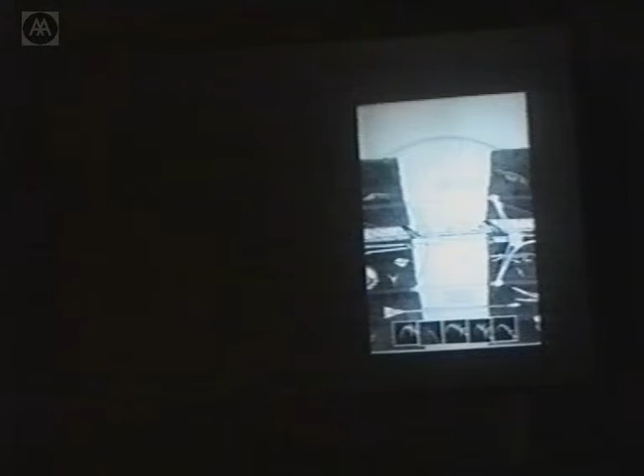And hopefully we can tell you a bit about how we have worked over the years and how our ideas have developed. Well, it was an irresistible competition because the title, The Bridge of the Future, was quite irresistible. And then the idea of actually designing a bridge related to nature was part of the brief. So that got us to thinking about how nature would design a bridge.

And we got talking about the structure of a horse, and then that led us on to the structure of a dinosaur, and that became the inspiration for the bridge. On the right-hand side, you can see nature tends to design very efficiently and very beautifully. That's a vulture's wing in the form of a Warren truss, and this is the skeleton of a dinosaur, which became the inspiration for the bridge.

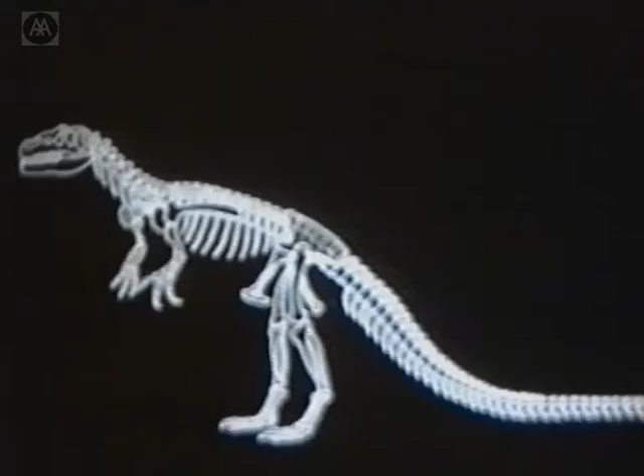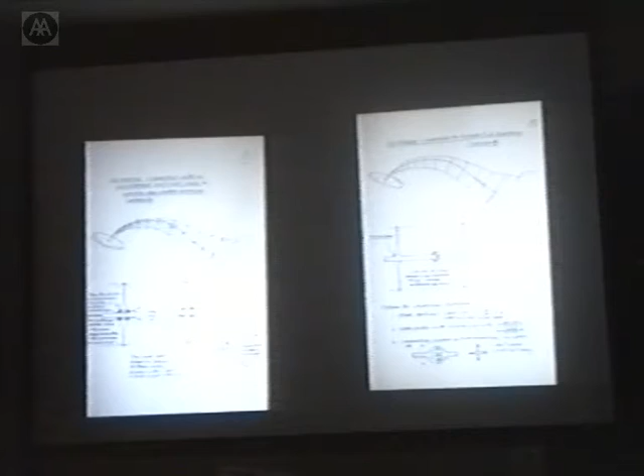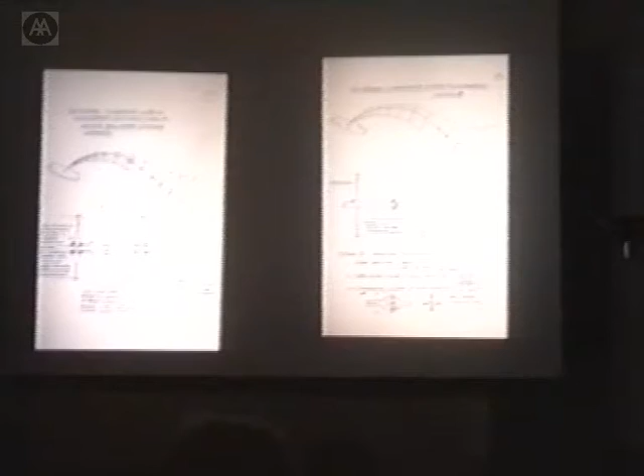We talked quite a lot about what we wanted the nature of the bridge to be like, how you'd experience it as you walked across it, and the idea of the suspension bridges that you see in the desert or something. You just walk along and they kind of move as you go along it. And since this was a pedestrian bridge, there's no reason why it should be really, really rigid. Engineers are generally taught to design movement out of a bridge, and we decided that the experience of actually walking along a safe but movable bridge would actually be something that we were after.

So we started kind of faxing what we thought we were talking about back and forth. And strange hours in the morning and the night. Yes, exactly. The 8-hour time difference was quite helpful.

We kind of got onto this idea that it would be a bridge anchored on one side, so have vertical and horizontal support on one side, the right-hand side on this slide, and at the other end it would be supported by almost a ball bearing that could roll around, and started to explore what the nature of the structure needed to be. And we had in mind the quadrupedal bridge that D'Arcy Thompson talked about in On Growth and Form, of the vertebrae carrying the compression and the tendons modifying the deflections, but not actually stopping movement.

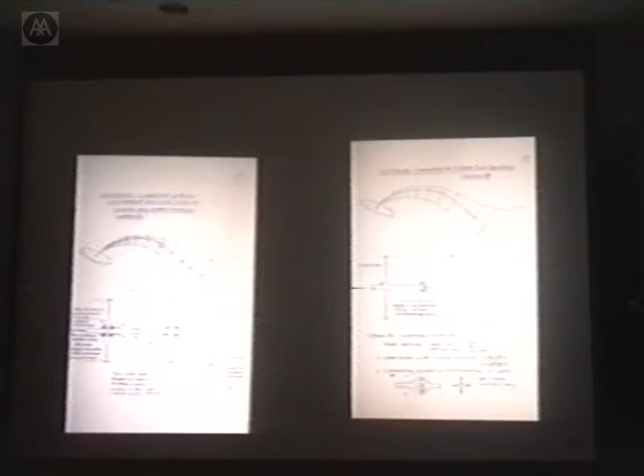And those slides just show what the connections between the vertebrae need to be, whether it needs to be moment connections between them, which is the slide on the right. If you didn't have any cross bracing at all, then you'd need to try and get moment connections at those points.

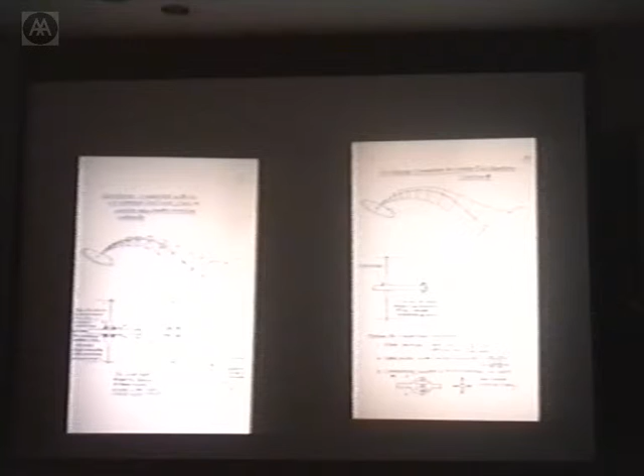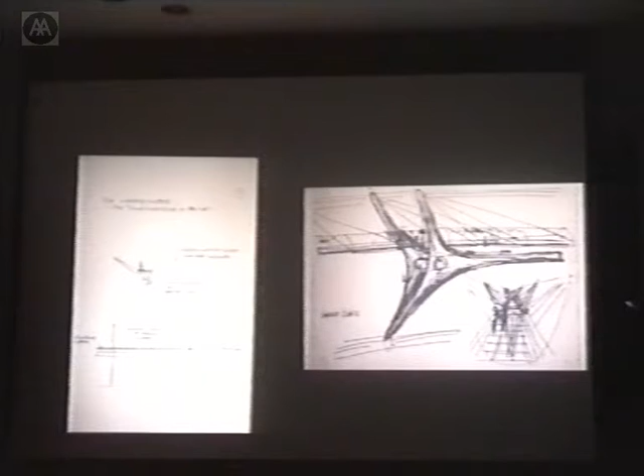And then the slide on the right shows the fax from David and Julia saying, well, could all the bracing come from one side, and what's the walkway like? How should it be supported? And so we developed that idea with all the ties coming from one side and going for the moment connection between the vertebrae.

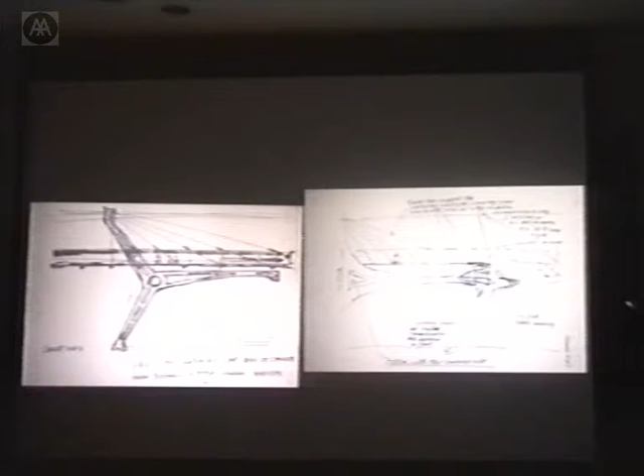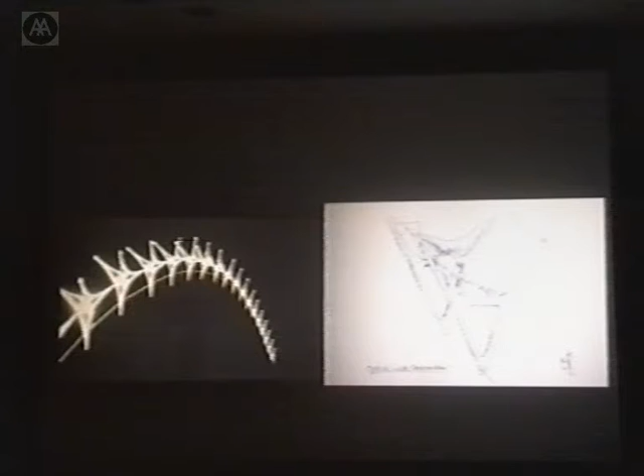And these slides show the development of the idea of the vertebrae. So the one on the right was my doodle, and then David and Julia made the model on the left. We made the model at the same time, sort of on the other side of the Atlantic. It's an upside-down model.

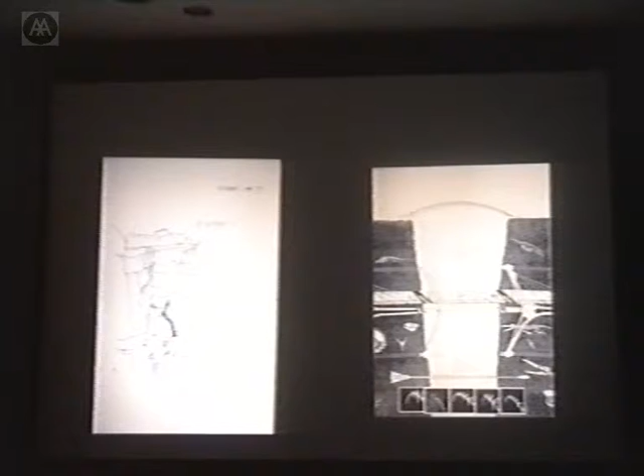Yeah, and well, for the entry, we had to actually decide where this bridge was. Up till then, we'd been really just talking about an idea of a bridge in the abstract. So we decided to put it over the Grand Canyon, since that was in between us at the time. We won the competition, by the way.

And then, after that success, when I came back from LA, there was another competition for bridges to replace the covered timber bridges in Vermont, and the idea was to have a whole series of bridges, different spans, but all the same idea. And we wanted to look at using timber, but in a more modern way. And also the idea of using the deck in composite with the structure below, so that you actually get a very thin deck.

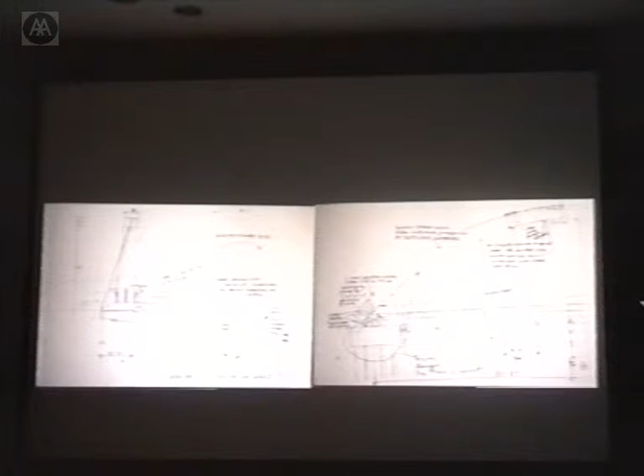So in fact, the deck is reinforced concrete, a thin 6 inches of reinforced concrete on top of timber beams that are all laid on edge, and you get composite construction by having shear connectors between them, and then just having the tie underneath to increase the lever arm, that part there. So the deck just needed to be deep enough to span between the edge and the midpoint of the deck.

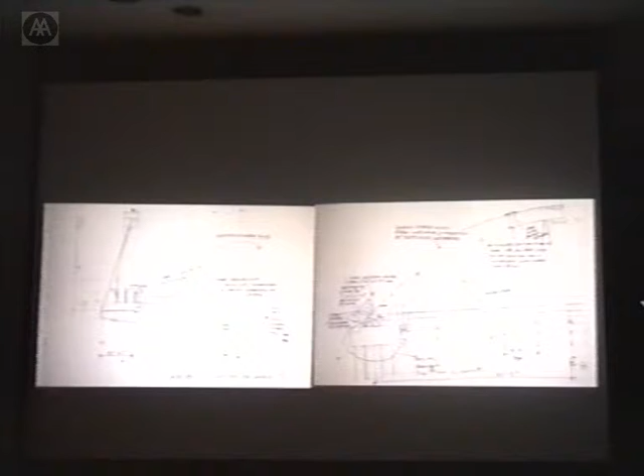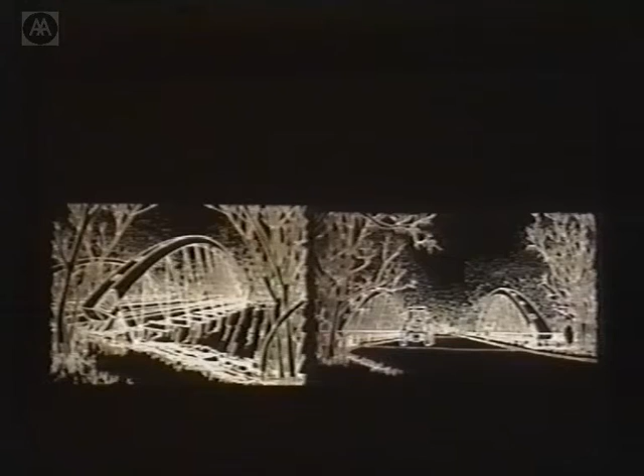It actually was a competition where we had to submit the calculations with the entry, which is a bit unusual. We then did another competition, which in fact was successful in terms that we won the competition. It didn't actually get built.

Speyhawk had its competition for a local centre for Thames Valley Park near Reading. This was a 200-acre business park that they were developing at the time, and 100 acres of it was going to be a natural park, and the other 100 acres was going to be a large amount of office space.

But this was the local centre that consisted of a 150-bed hotel, something called the Information Age Centre, which was an exhibition centre sponsored by people like the Science Museum and various members of the IT industries to display their wares. It was actually going to be an extension of the Science Museum, and it was designed for children from 7 to 19, trying to get more people into the IT industries, and that was linked to a conference centre and a leisure retail building.

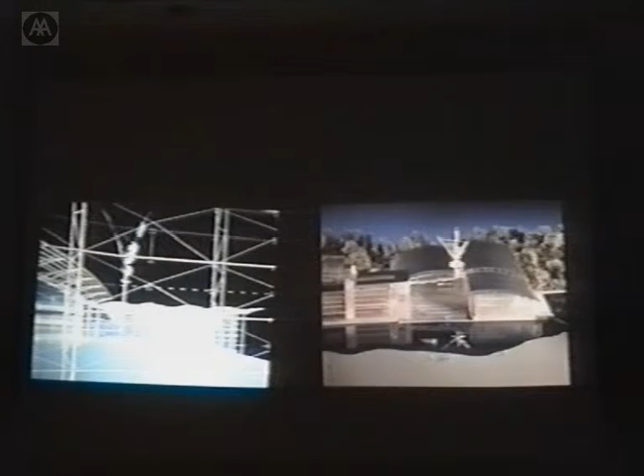the slide on the left shows the beginning of the ideas for the structure. These buildings here have 34-metre clear span, and the columns in this direction at 14-metre centres. And we wanted to have a structure that would look quite light and be expressive. It's basically primary curved trusses along these lines that then support these gull wings, which have a strut on top here, so that they're bending stiff, and there's a pin here between them.

Because of this kind of arch shape between the trusses, that actually gave lateral stability to the primary trusses, which was quite handy. And then just a couple of places down each side, we put cross bracing between the columns. This was our flight of birds.

Then we were invited to Liverpool by the Merseyside Development Corporation for a limited competition to look at the Pier Head site, which, as everyone probably knows, is the primary public area in Liverpool. And if you go to the next slide.

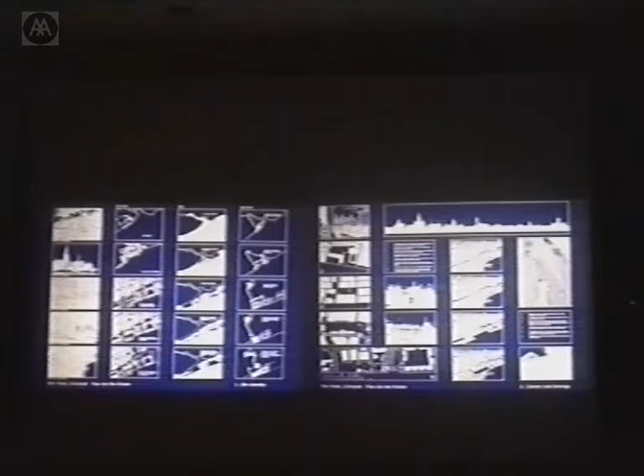And this was another part of the site analysis, which showed comparative sizes of various public spaces. This was Venice, that was Beaubourg, and that was Red Square, which was quite incredible. We actually discovered that Pierhead was about the same size as Red Square, which was a bit of a surprise to us.

The brief basically had two strands, one of which was to design a landscape plan, a £3 million landscape plan for Pierhead that could be carried out in the short term. And they also asked for a vision for the future.

And this sort of incorporates the two of them. And one of the things that we proposed was that this 6-lane highway be put underground, for the sort of long-term plan, so that area could become a park. It's gone again. Anyway, the area between the Three Graces buildings and the central town could become a park, and actually, that would make this link between the Mersey and the centre of town.

The other thing we did was we talked to Tom Lawson of Bristol University about the space, because it's a very hostile space. I mean, it's very dramatic and it's a wonderful space, but it's also quite hostile, very, very windy. People have been known to have to hang on to lampposts in order to stand up in certain wind conditions. So we talked to Tom Lawson, who's an expert on wind, and talked about where we might position various buildings to

temper the environment. And the conclusion was that this winter garden, which we proposed along the parallel to the Mersey, would actually create a sheltered walkway along the Mersey, which is something that the MDC is promoting all the way to Albert Dock, which is sort of that way, to Princes Dock, which is that way. And also, it would help the environment in the main space as well. So maybe you'd like to talk about the winter garden.

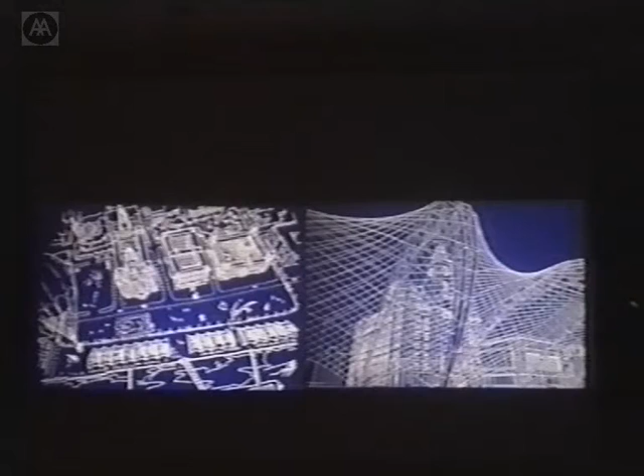And also, it's a structure which basically has triangulation in plan. If you go from the ground and find a cable that goes up, it then hits an arch. So you do get triangulation for loads in this direction, which you can rely on if you're using cables, but you wouldn't be able to if you were using fabric, because with a fabric structure you always have to think of the situation of what happens when there isn't any fabric there. And then across in this direction, the arch itself is quite stable.

We also developed a system of natural ventilation for the winter gardens with our services engineer Loren Butt, and we talked to glass manufacturers, didn't we? We talked to Pilkingtons, who are actually being reasonably helpful on this project.

Yes, they didn't throw up their hands. Perhaps they didn't think we would win.

Well, this is another competition, Venice Gateway competition. Yes, we'll describe this very quickly. This was, everyone probably knows, the Piazzale Roma, and the proposal was for a gateway along the canal, and also it was redesigning the coach station. Maybe you go to the next one, we can describe the structure. Yeah, we'll just touch on this quickly.

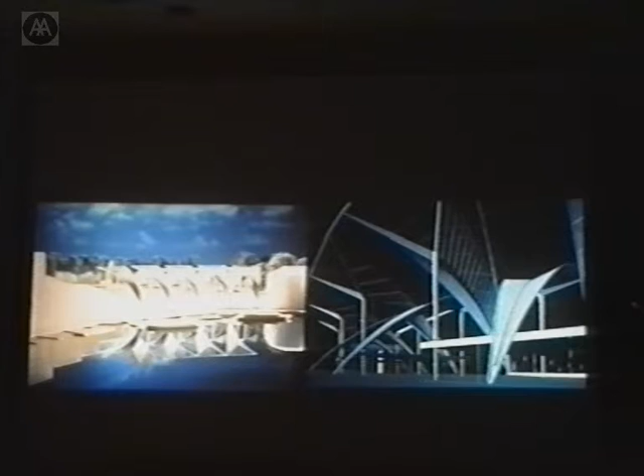So it was looking at these panels which are folded plates, which really just act as a 3-pinned arch. So this plate has some bending stiffness because it's folded and goes up to the top of that column, and the column goes down to the ground. And each of these plates actually touches each other so that they lean against each other in that direction. And we were using timber, and the references were to the hulls of the gondolas, the boats. And sort of Gothic arches. Yeah.

Now, all of those competitions and things, I suppose, were really the foundation of our conversations. We're just dipping in and out of conversations a lot. But then finally we got to a project which we got to build. Yes, first built project. We were invited back to Liverpool by Merseyside Development Corporation to design a water sports centre, which was going to be in Queen's Dock, which is there. So it's all the way along from Pierhead there.

And there was actually an existing water sports centre that was housed in Portakabins and things like that. A very successful one, which was mainly for kids in Liverpool to learn how to sail and windsurf and canoe. And what they did was they gave hour-long courses, which were cheap and therefore accessible to a very wide range of people.

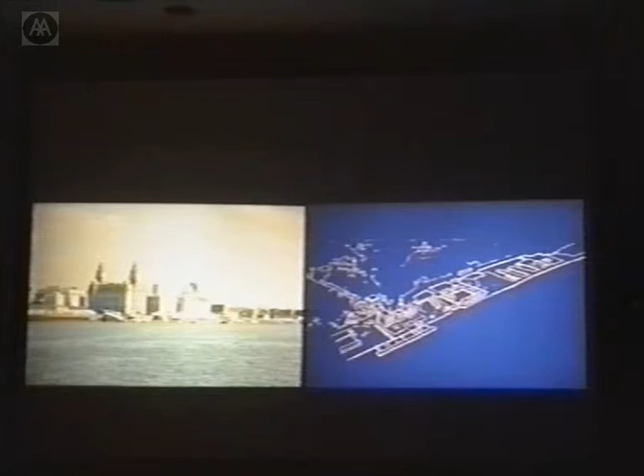And we continued the historical research, and we looked at the traditional buildings that had been built around the docks, and this was one that we discovered, which was cast iron columns with timber infill. And that on the right is actually a picture of Queen's Dock, only in 1948; the dock actually declined very, very quickly.

So we knew we had this site which was basically a bit of water that you had to get to by bridge. The client gave us a site which was in the water, and he gave us a budget, and that was all he gave. And the budget was about £1 million, so quite small. And so we started off looking at ways of putting a building on the water. That's what the slide on the left is.

The water level doesn't vary by very much, about 300 millimetres, plus and minus. And in some ways it would have been very nice to have a floating structure. We actually did some research on making a sort of barge structure, or even trying to buy an old barge. That turned out to be the most expensive option. It would have blown half our budget, so it was just out of the question.

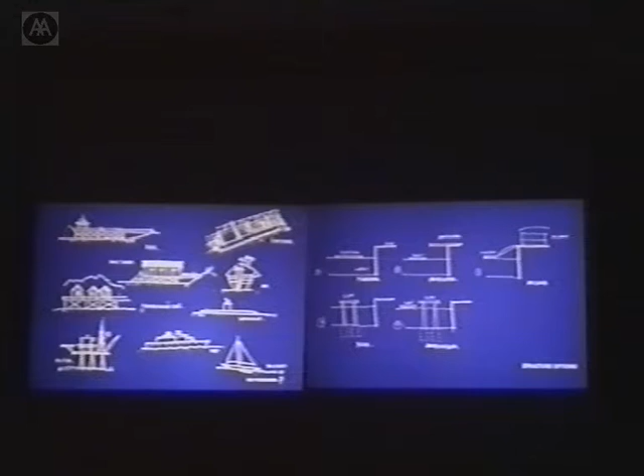Which is why we ended up with the option that you can see, number 5 on the right, this combination, basically piles that go down to the bedrock. So they're about 13 metres long, and they support a deck that's just above the water level, and then we'd have floating pontoons around the edge. They would go up and down, with a ramp so you could get up to the level. And you get to this building by bridges off the dock wall, which is what the slide on the left shows.

So basically the brief was for showers. There was a very clear component of wet facilities, which was showers, staff facilities, storage of wetsuits and things like that. And then there was the clear division with the dry component, which were the offices. They wanted a lecture theatre and a cafe.

So we developed this fairly simple diagram which had the wet at water level and the dry at dock level, because another of the features of the Liverpool docks is that there's this approximately 3 metre difference between the dock level and the water level. And we used that to advantage in having the main entrance to the upper level. And then you went down to the boat storage and the workshop and the plant room.

And so the slide on the right shows the structural diagrams. Starting from the deck, it was important that the columns would be set in from the edge of the deck so you can pull in the boats and windsurf boards, etc. But at the level above, we really wanted to have a clear space from side to side. So that's why these columns come up and then branch out, picking up the edge columns and also reducing the span of that slab.

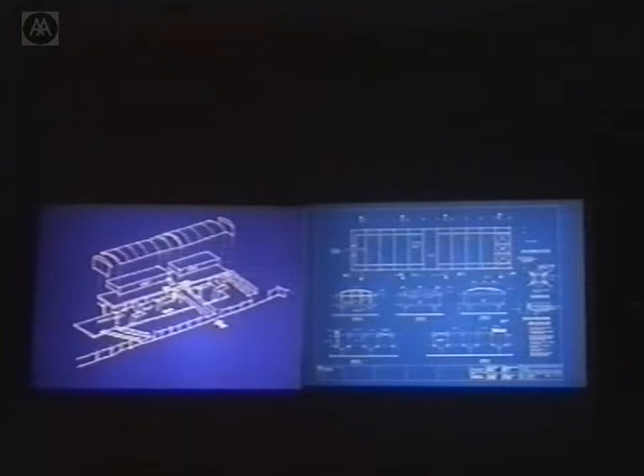Each of the tops of the columns then support a frame which is basically a rectangular frame with a curved beam on top, which is pinned at both ends. And the bottom of that rectangular frame supports another concrete floor. So the slide on the right shows the build-up from piles, deck, columns spreading out to pick up this series of frames. And so the building is like cantilevered 13 metres up in the air from the ground, effectively. Except that's covered in water.

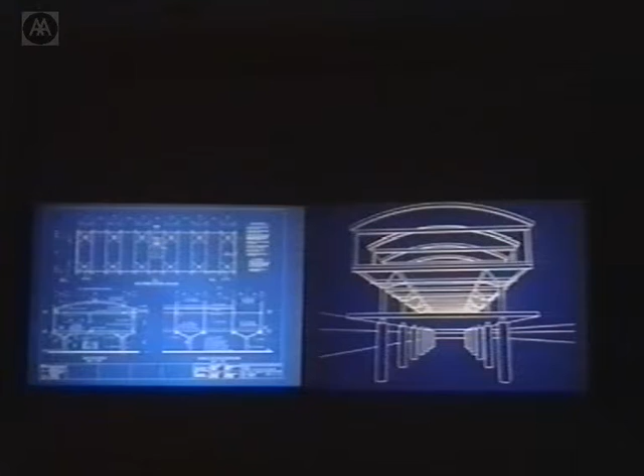It's quite a light and simple structure, but the structural bit that we put money into was this connection between these columns, which cantilever, and the branches that they support, and we decided to see whether we could afford to have castings for that. But it's true to say that the technology for castings has actually developed such that it's not actually that expensive to do.

One of the reasons for keeping it that far out in the dock was that part of the brief was they wanted a sheltered area. So this becomes, yes, for the beginners to do their sailing, and also for competitions for canoeing, so that distance to the deck was determined by that, and also security.

I mean, in Liverpool, security is a slight issue. Big issue. Yeah.

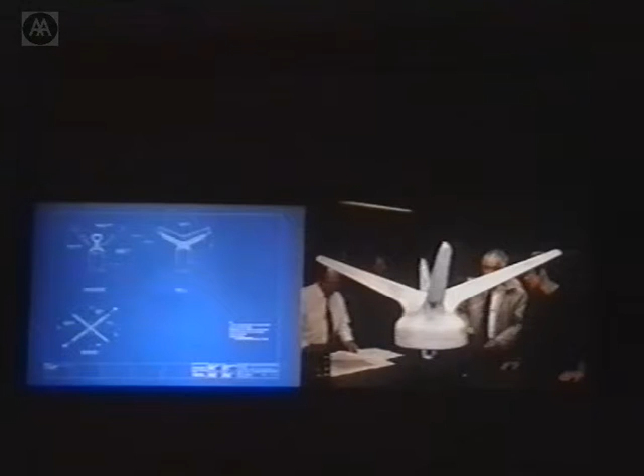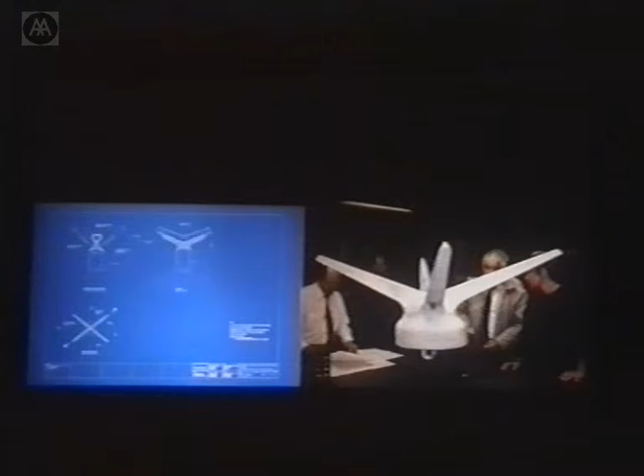And one of the things is that because you had to bring it on site and put it together as easily as possible, we specified that they would have to do a trial erection in their works. That's the slide on the right, to make sure that they did get the plates in at the right angle for that pin joint.

And you can see on the slide on the left the shear studs here for the concrete that was going to be cast on top. It was in situ concrete for that deck. And the other thing to say about the steel is that for fire protection we used intumescent paint.

Whereas if you just have a primer and put the layers of paint on top of that, then when the top paint gets chipped, you have to strip off a huge amount to make repairs to it. So this has a longer life. Even so, we would say that it has to be repainted every 8 to 10 years.

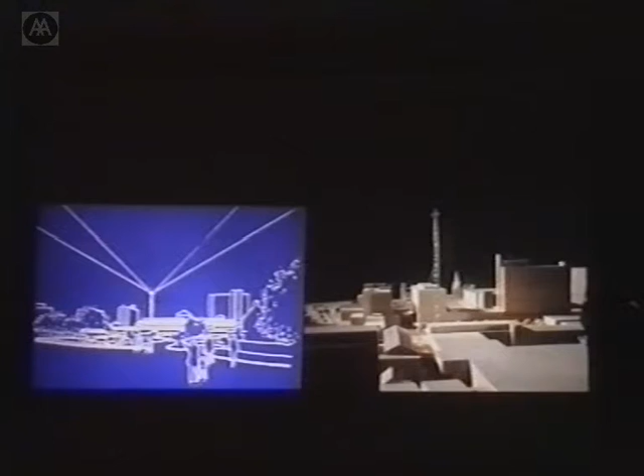Talking to Jane, we examined a lot of different materials that would do that, and we came up with ideas for windmills and looked at wind sculptures produced by Japanese sculptors and all kinds of different ideas. And eventually we discovered dichroic glass, which is a coating that's put on glass to make it work like a beam splitter. The effect it has is to reflect the opposite color of light that it transmits. And it's a very, very pure process because unlike stained glass or tinted glass, it doesn't absorb anything. So the colors are very vibrant.

And in the end, we decided to use solely that material and to put it within a stainless steel shaft, which would reach up into the sky and allow these 5-foot square sheets of glass to spin in the wind. So we looked at options for what this mast would be like. And of course, we did start with the normal options, like 3 verticals and just having triangles connecting them on plan and bracing and everything. But to have the squares being able to rotate and be able to look at that kind of clear of clutter, it worked out much better visually to have circular hoops connecting the verticals.

So this is slightly less efficient structurally, because it means that you'd be putting axial forces into basically a bit of arch at 1/3 of the circle, and you put some bending in. But we found that those forces were not so big that the tubes got really big.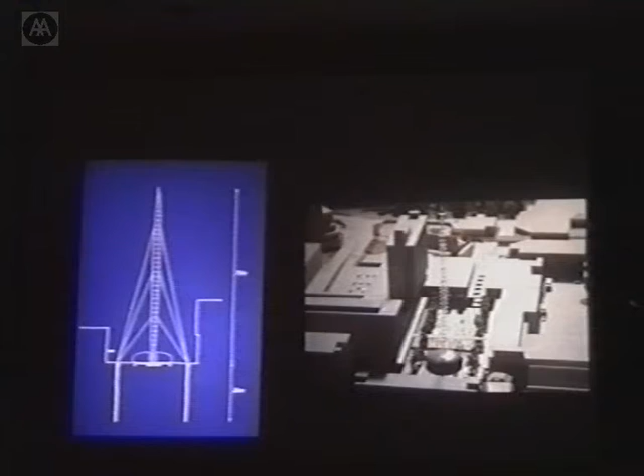But the other thing we had to investigate, and we'll probably need to do more studies on, is actually where the guys should go. Ideally, you wouldn't have the guys quite as vertical as this, but of course we're constrained by the buildings around. And what the guys are really doing is they're controlling the deflection of this cantilever up into the sky. And at one level you could say, well, why can't you just let it move around a lot? And you will see that there are some very skinny masts around. And that's what we need to do at the next stage, is to really determine what the deflection criteria should be. And then we can play around with what the sizes of those guy cables need to be.

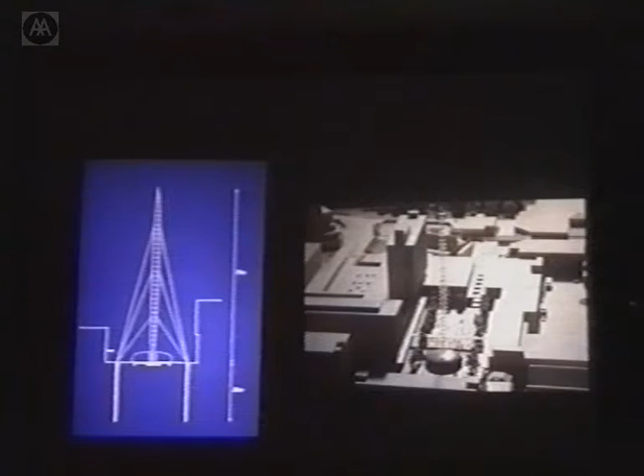The photograph on the right is a photograph of the model, and the model makers very cunningly used actual pieces of dichroic glass, and they all spun. So you could blow on it, and they would spin, and they would do exactly what we thought it would do. So it worked very well from that point of view.

And at the bottom, we're designing an interactive visitor center for kids, so they can come and learn about the weather. And the structure of that's very simple. That's just curved beams all leaning against each other in the middle with some cladding. What's very nice about the structure from the way we see it is that the structure is where you want it. It's on the outside, but it's a very, very open structure. It's very slender. Although it's obviously this great big male thrusting thing into the sky, it's got a lot of feminine qualities about it as well.

Tom Lawson was very interesting about how the glass would react in the wind, and we're constantly learning things about how nature works and affects structures, and the way you need to design them in response to that. And I think that's relevant.

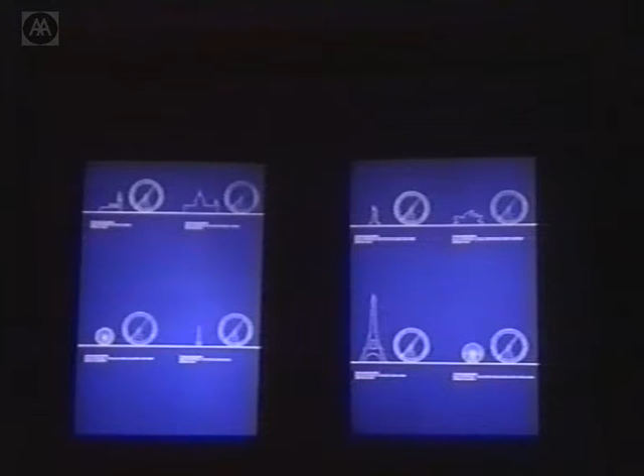This just compares it with some other well-known landmarks. It's big. It's big, yeah. It's half the size of the Eiffel Tower. Yeah. Also, it's hanging over the river.

Well, we wondered whether there was a case for redesigning the wheel, that's probably not the right way to look at it, but looking at the way wheels were designed in the past, it became quite interesting how you would go about building a wheel this big. Not only how it would work structurally, and so you get into how the rim works and how the hub works and how everything works that needs to connect those two bits, but also how you would go about building it, and obviously looking at how other wheels were built in the past.

Up until about 100 years ago, the biggest wheel was the wheel on the Isle of Man, which is 72 feet in diameter, and its spokes are alternatingly compression and tension, because it's all made out of timber, and so it has to be held together. And then there's obviously the original Ferris wheel, and the biggest wheel at the moment is a wheel that was built about 15 years ago at Cosmo World, but it's not a particularly elegant structure, and its supports are even less elegant.

I should really say that when we first started looking at this, it was in response to the Sunday Times competition for a landmark for the Millennium, which quite a few people went in for, and there were no prize winners, and there were no commendations or anything. And I was quite impressed, because David and Julia said afterwards, well, hold on a tick, we don't need this to be the winner of a competition. This can be built. It can make money for itself, and I think they were really quite innovative in just putting in a planning application for it on a site they didn't own, and I think there are lessons to be learnt here about how you can make projects for yourself.

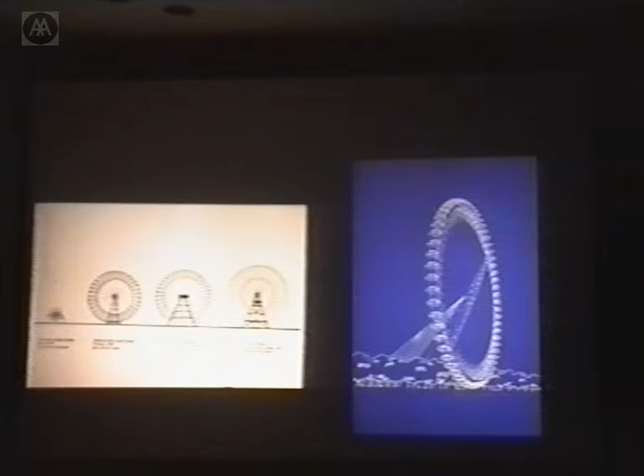And in fact, we found that this arm was quite useful when we were thinking about how you would build it, that in a way it's a derrick. So you could build the support and then construct this arm, which would be sort of in the vertical position, and then from the river start adding bits on and rotating the arm till you get all the way around, if you can imagine that. And that idea of the stiff arm has still remained, but in slightly different form, as you'll see. But here's some more images of that original idea.

Each of the capsules, which is totally enclosed with glass, takes 16 people at a time. So there's actually about 960 people on the wheel at any one time. And it's a 20-minute flight over London, basically. It takes 20 minutes to actually go around it. And much cheaper than buying a ticket to Paris and hoping for a clear day. So it would be accessible to a lot more people. A lot of people who can never even afford to go on a plane.

The only place in London that you can actually see London from a height, and as a whole, is actually at the top of St Paul's at the moment. Yeah. And not everyone can actually climb all those steps. So we worked out today that you could see the Bracknell Tower from the top of the wheel. The other thing is we deliberately put the capsules on the outside of the rim, and they're held in these rings, and so the capsules then go round and round. And we've been looking at the bearings and things like that.

Yeah, the whole capsule. So you'd always stay standing vertically, we hope. And the other thing to say about it is that it's powered by the Thames tidal power. Yeah. Because it moves very slowly, once it's going, it needs very little power to keep going. So we probably would need to use electricity from the grid to get it started. Yeah. But once it's there, then it should just...

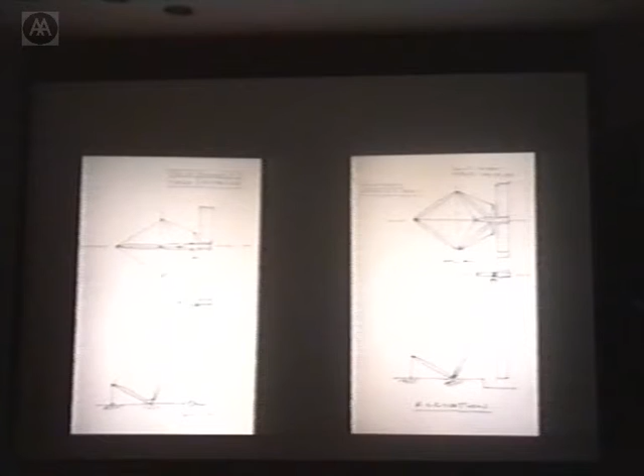And this cruciform member here is the element that's the spindle that goes into the hub. It's like this so that we can have a cable here and here, which provides some rotational restraint at the top of the arm, because when wind blows on the wheel, you've got quite a large tendency for the wheel to twist that we need to resist and carry back to ground. And it's much easier to take it back in this arrangement than to try and take it all in torsion on this inclined element.

So this is what the current design now looks like. This is the right one, yeah. That's the old one on the left, with the inclined A-shaped column with all the radiating ties behind it. And this is the one we've got. There were about 30 or 35 points of connection to the ground with the first design, and with the new design there's only 3.

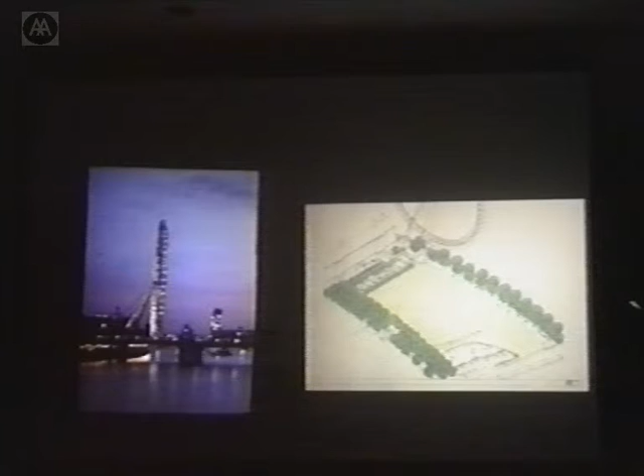So at the beginning of this feasibility study, we kind of opened up the whole discussion again about what the wheel should be like. And you have to go back to the bicycle wheel, which if, say, you have 60 guys, which is quite normal on a bicycle wheel, in fact, then this gives you the thinnest rim, because you've got even support to the rim all the way around its perimeter.

But the problem is you can't really build this. I mean, you can't lay it out over the Thames and then hoik it into position. Not 500 feet. And similarly, this one on the right just shows what happens if you only have 12 guys or spokes. What happens is that you're only supporting the rim at much wider centres, so the rim has to span between these points of support.

Now, just to remind you that on a bicycle wheel, when you look at it in section, the cables don't go straight from the hub to the rim, they sort of cross over, which gives you bending stiffness out of plane as well. So not only does this have to span in the plane of the wheel under loads like that, but also out of plane, there's more spanning for it. So altogether, the rim is working much harder.

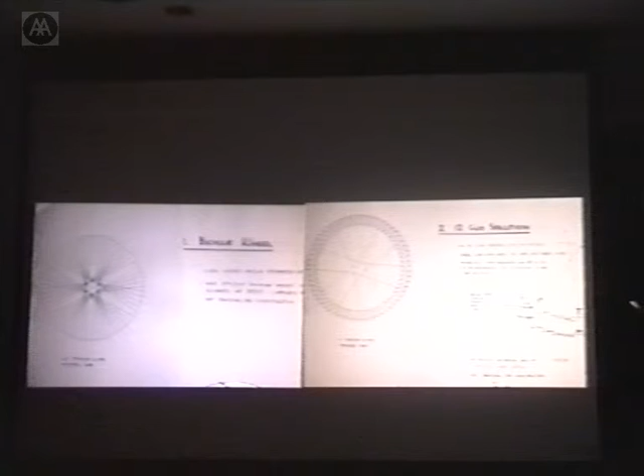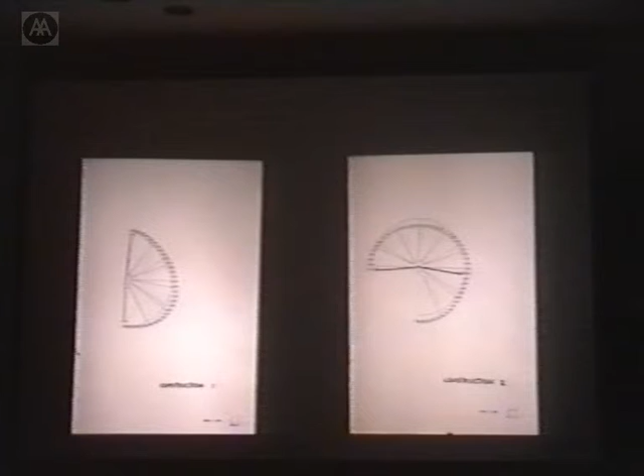I mentioned about construction sequence. In fact, that's turned out to be the most crucial load case for the design of the rim, because you gradually build up. So you've got your arm, and you gradually add the pieces, and you can see how the rim tends to sag under its own weight as you build it up. And the absolute worst case is right at the end here when you want to make your last connection. The scale is exaggerated.

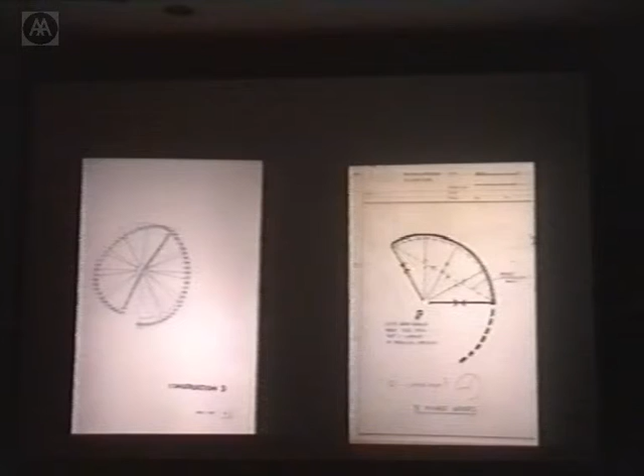In fact, if you had 3 stiff arms, this is showing 2 of them in position, and then another one could be added here. This gives us a much better construction diagram, because you can put a tie in here, which keeps these 2 from having to act as bending elements. They can be just pure compression elements. Whereas here you can see this arm is having to bend to carry the loads. So we realised that there were advantages to adding more arms.

Well, we then got into this whole discussion about what we are talking about when we're trying to get efficiency. And David threw out this challenge, basically: well, what do you mean by efficiency? And Brendan McNiven, a young Australian engineer in our office, thought about this a lot. He said, I'm not going to be defeated by that sort of question. And so he went back to this physics formula, that efficiency is output divided by input, and tried to list out what the outputs and inputs are.

So the inputs are the materials, and you measure how efficient you are in terms of the weight of the materials and the cost. He's Australian, that's why he talks about dollars. And the cost to the environment. And then in design terms, he meant our design effort. There's time and cost. And the energy to making the material and also to running it is measuring cost and cost to the environment. And what do you have to gain?

Well, there's the aesthetics, the wheel itself, and then as part of its environment, and function, it has to work. You just make sure that it doesn't cost too much, you can carry the right number of people, and everyone's happy with it. And then after the 5 years when we take it down, can we reuse it again or can we sell it?

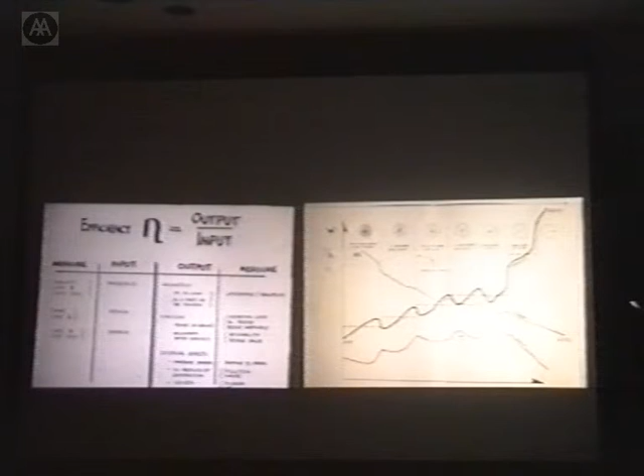Can you explain what you mean by a spoke? Oh, right, yes. If you imagine, you know what a bicycle wheel looks like. That's what I'm talking about. I think we call it a spoke rather than just a tie, because it's pre-stressed, so it can take compression as well as tension. But we've been debating what word we should use, whether it is a spoke or a guy or a tie. Anyway, that's what we're talking about.

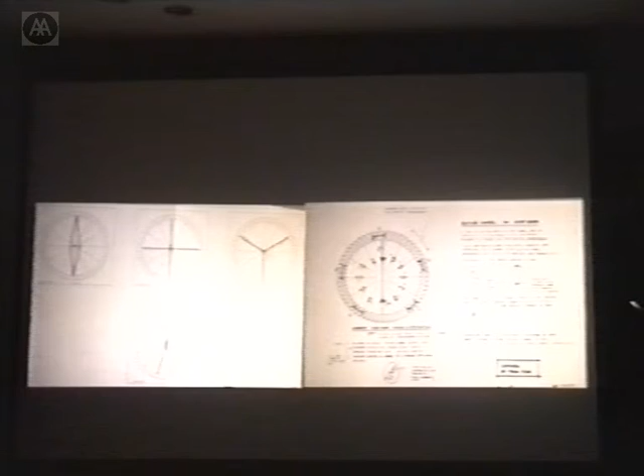And we had to keep trying to draw up what it would look like. The slide on the right is again exploring this thing about the stiff arm, and whether we could just replace, so this is a 12 spoke option, but 2 of the spokes are actually bending stiff elements. And we've been doing analyses.

These are envelope diagrams, which means that they represent the maximum bending moment at that point under all of the load cases. And funnily enough, there's not that much difference in service between the 3 stiff arm option and the 2 stiff arm option. You can see this is 39,000 kilonewton meters, and these are 26, but it's not an order of magnitude bigger. And this is 70,000 kilonewton meters, and this is 65. So in terms of the maximum, it's within the accuracy of our analysis at this stage, really.

Which again meant that, and in some ways for me that was nice, because I could then go back to David and Julia and say, well, come on, you've got to make some decisions based on what you want it to look like here. You can't just choose on the basis of weight. Drat.

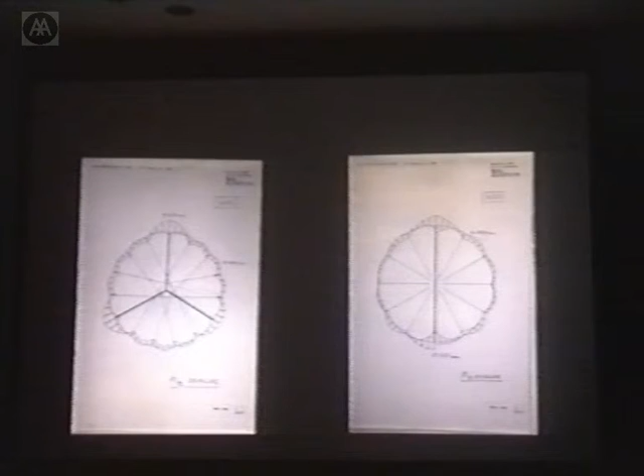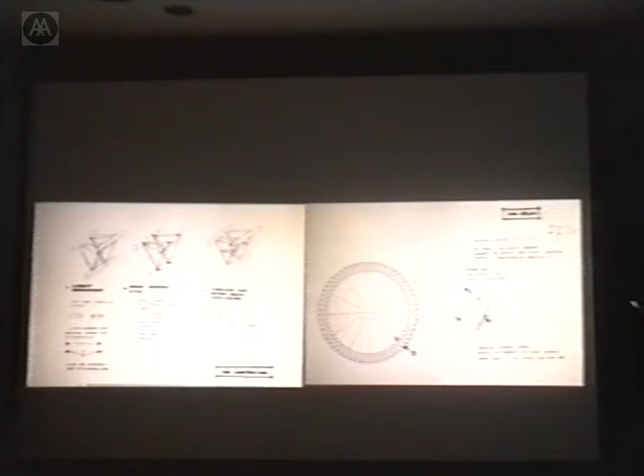Well, these slides are showing some of the things about the rim construction. This is what we put in the original design, and we still really like it, which is that the bracing of the rim all goes to a centre point, and we don't have bracing in the face of it. But we've been doing studies on that as well. It's true that if you put bracing in the face, it's a stiffer rim, and it also has torsional stability. This doesn't have much torsional stability.

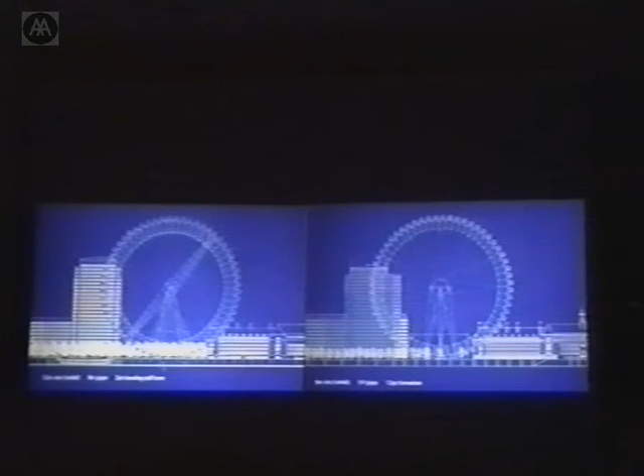The way that we can deal with the torsional stability is at certain points to have cables that actually go to the top part of the triangle. So if we had it attached there, say every other set of spokes, we could provide torsional stability between those points. The other thing that we found was an advantage was to have some of these cables coming like this to the edges of the hub. That gives torsional stability to the rim in its plane.

Do you want to talk about what some of these images look like? Because what we were trying to do when we talked about efficiency is we wanted to trim some of the weight out of the structure. We wanted to reduce the depth of the truss. We wanted the least number of ties or guys or spokes, the smallest size sections. We wanted to make it as minimal as possible, but also as visually light as possible with the least number of elements. And it's impossible to have all of those. And so it became a question of balancing them and fine-tuning.

So these just look at a number of different options of rim weight, rim depth, as against numbers and arrangement, geometry of spokes or guys. I mean, the original rim was 12 metres, so now it starts to come down to 10 metres on the left, and then...

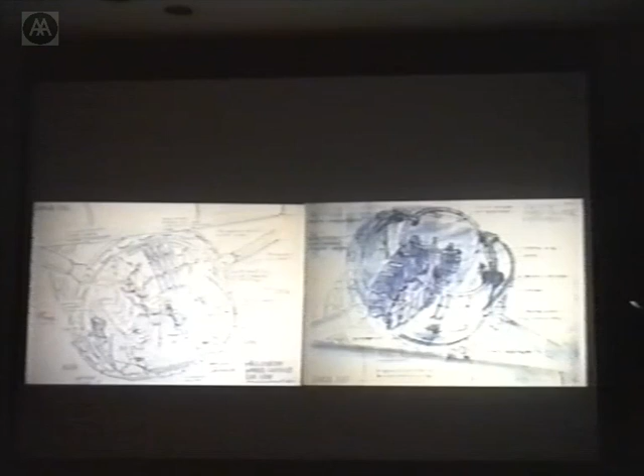And here's some views of what we hope it will be like. Well, this is the old design, but that's what its presence would be. Okay, that's it.